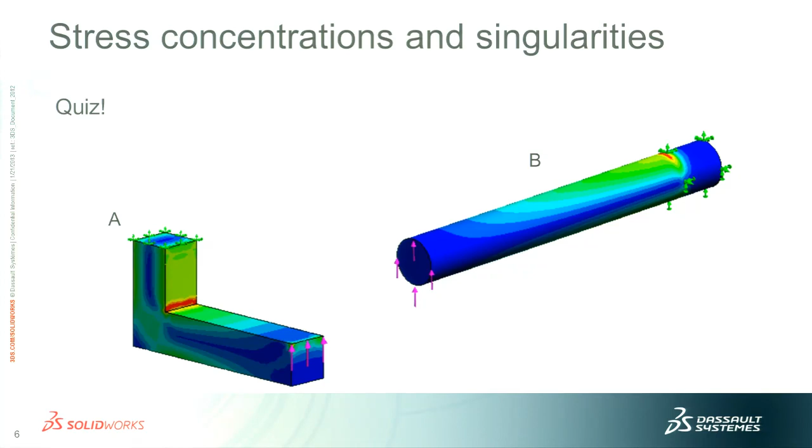Nobody? Oh, a couple of people, yes. And actually, there is a stress — it's a singularity that you got there. It's not as obvious as for the other one, but that's true. I encourage you, if you don't take my word for it, to model this. It's very simple — run it, refine the mesh, and refine it further, and you'll see that the stress is ever increasing.

Two more examples with the shell mesh now. We were using a solid mesh earlier. Model C, you have the four edges of this square hole. They're fixed, and we have a locally high stress there. Who votes for a stress concentration? Nobody — stress singularity. All right, you get the drill.

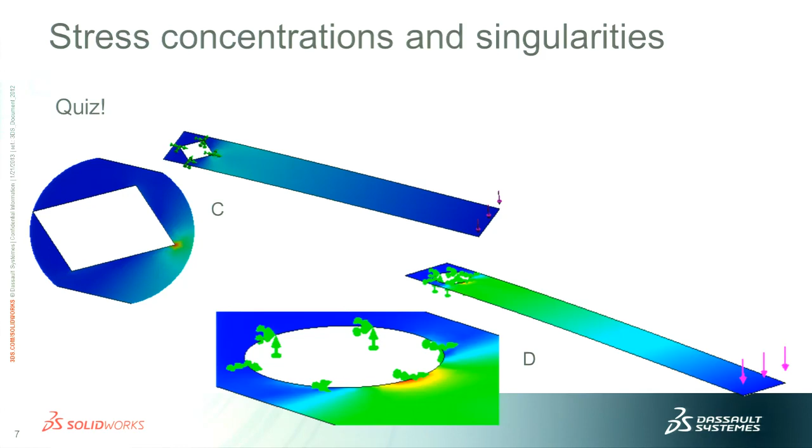And finally here for model D, where we have this circular edge that is fixed, and we have a local high stress there. Who votes for a stress concentration that will eventually converge? Yes, cool, stress singularity — no, it's not a stress singularity. It is a stress concentration.

All right, so this is maybe still a bit confusing for you, so we're going to go through an example. All right, let me drop this for a moment. Cool — oops, sorry about that.

So we have some kind of cantilever bar here, 10 millimeters thick, 100 millimeters long. We have a sharp reentrant corner there, so that's going to give us a stress singularity. If you do the math to calculate the theoretical stress right there, it's given by this formula, and you would get 300 megapascals predicted nominal stress.

What I'm going to show you in the following slides are the effects of two combined phenomena we're going to encounter. First is the effect of the stress singularity, which will make the stress value diverge and get higher and higher. The second is stress dilution — a local lowering of the stresses at the corner due to averaging at nodes common to elements with very different stresses. I'll show you that graphically a bit later. We're going to see that the relative influence of each of these phenomena depends on the local element size.

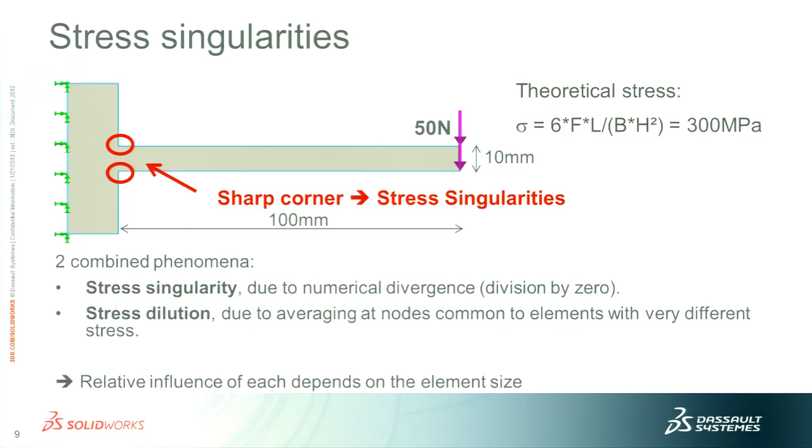So let's take a look at the first example. If I can go to the next — all right, cool. So here we mesh the model with an element size that's half the thickness. We can see the local high stress is there, but you can see that the max is not at the corner, it's slightly off. And if I plot the stresses, with the stress value on the vertical axis and the distance to this point on the horizontal axis, you see that close to the corner there's a drop. The stresses go down. And that's counterintuitive, isn't it?

Oh, come on. So this is what's happening.

There are two ways of doing stress averaging and getting results: elemental results, where you average the stresses within each element, and nodal averaging. What happens here is that if you take the stress at the corner node, the nodal stress will be the average stress taking into account the value for this node as it belongs to different elements. So the value here will be the average of this value plus this one and this one. So there is a local dilution of the stress value because it's averaged over only one highly stressed element and three elements with low stress — and this is what you see there.

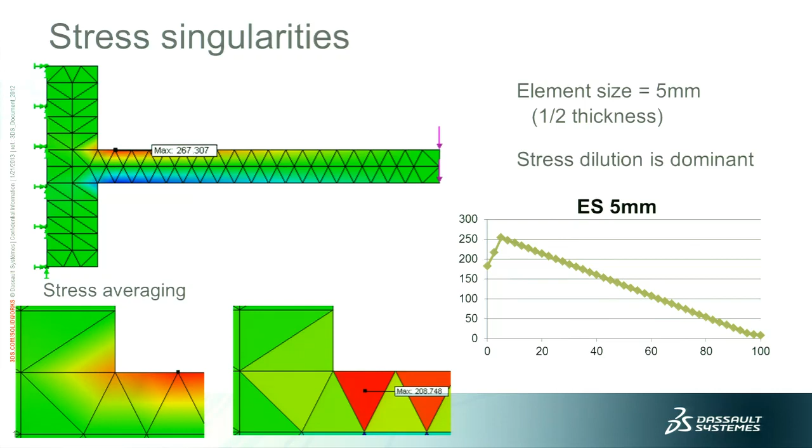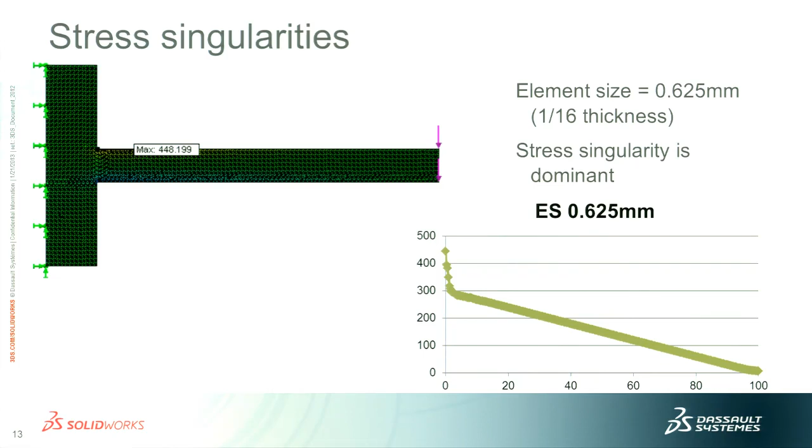Refine further, now I have 3,300, and it would go on and on. But if I plot all these graphs together and zoom in on this portion, focusing between 0 and 20 millimeters away from the corner, this is what we get.

Each curve represents the stresses with a different element size. If you use an element size of 10 millimeters, equal to the thickness, you're just off. But for everything else, you get a curve that is superimposed, and if you continue it in a straight line, disregarding what happens very close to the corner, you end up at 300, the nominal stress we calculated by hand. So even where you have a stress singularity, you cannot trust the value you get there, but you can continue in a straight line and get the nominal stress, which does not take into account the effect of the corner.

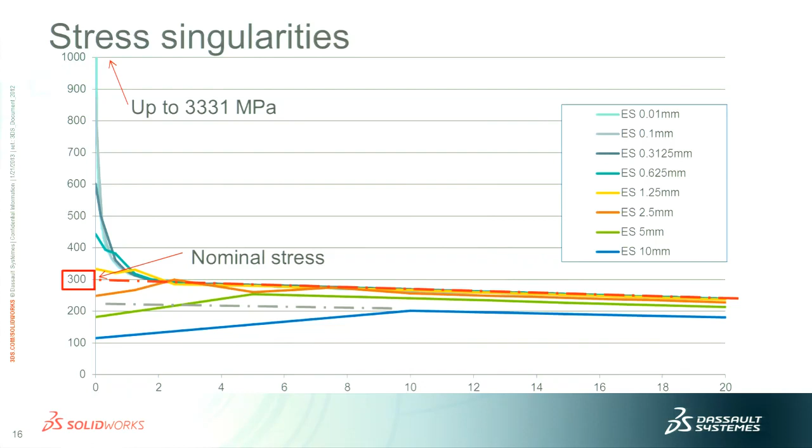In real life, perfectly sharp corners don't exist. So let's assume we have a very small radius there, which was not previously modeled, but which we can now decide to take into account. Books will tell us the local stress concentration factor, a multiplier used with respect to the nominal stress, and then you get the expected stress value there.

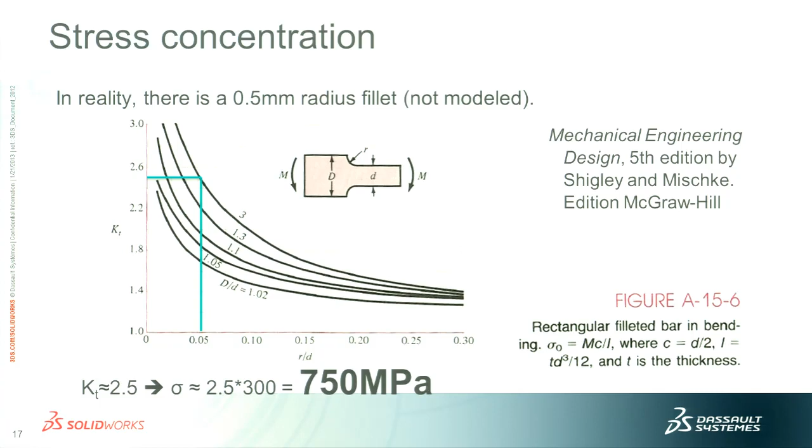I'm using this table from a book called Mechanical Engineering Design, and here the predicted stress concentration factor is about 2.5, which gives us a predicted stress there of 750. Sure enough, when the fillet is modeled with a relatively small element size, we get close to that value. We can try different mesh sizes there and see what effect it has on the stress.

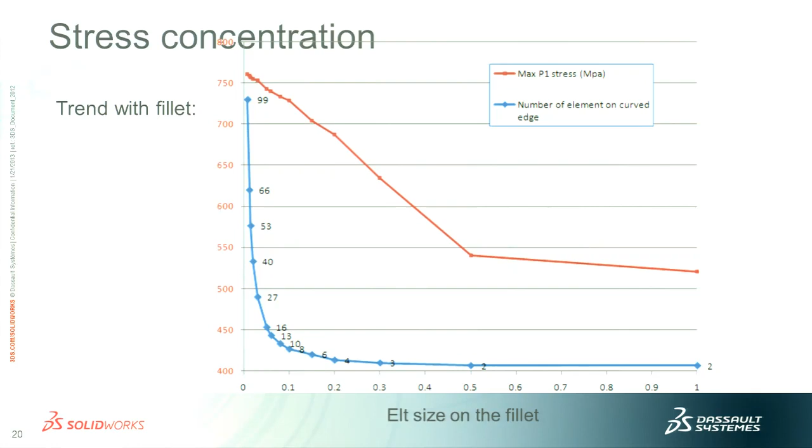To summarize: when you have a stress singularity, you can never trust the value you read off the screen. However, you can continue the curve all the way to get the nominal stress, in our case 300 MPa. If you're lucky enough to be in a situation covered in a textbook, you can get the stress concentration factor, multiply them together, and get the actual stress you will have. For a stress concentration, you should not take the value at face value when you have a coarse or medium mesh, but only when you have a fine mesh. However, with a coarse or medium mesh, the correct stress value can still be derived by extrapolation from several runs, just like the 750 mark was derived from this value and that value—continue in a straight line, and you get it.

So we can ask a question a bit further, because 750 MPa is quite a high value, and you might expect some yielding to happen there. So what if you actually had some local yielding?

What happens is that even though we predicted with the linear study a stress of 750 MPa, now the stress is barely beyond 300, the yield strength. Not only that, the yield area is quite small, right? We're not yielding across the entire cross-section there.

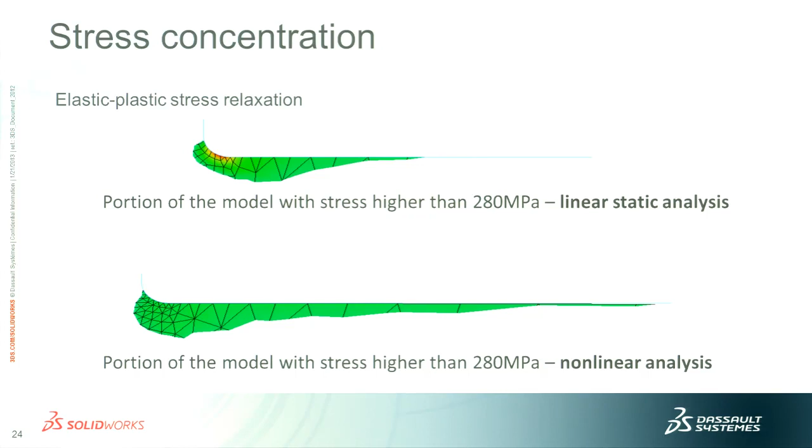And that's called plastic adaptation or elastoplastic stress relaxation. These are the two expressions that are commonly used for that. The material yielding prevented the stress from skyrocketing at the expense of two increases. The first is a stress increase all around the yielded zone, which is what I showed in my previous slide. And the other increase is an increase in the deflection.

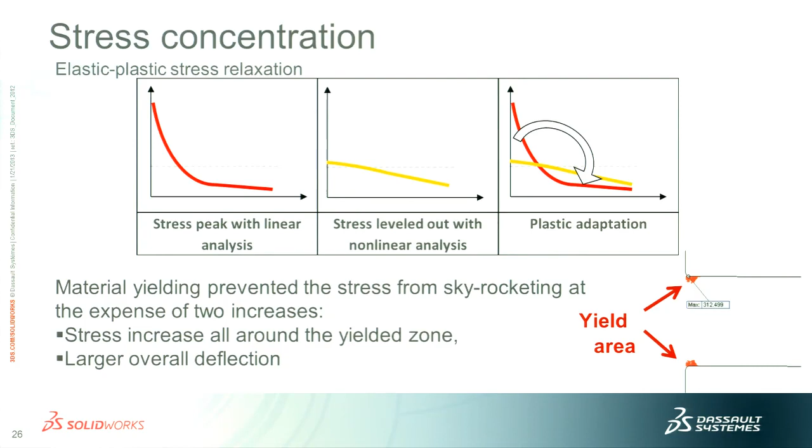Now, reflecting on this, we can ask three questions about the last model that we saw. First of all, will it break? Second question, is it safe? And third question, is it acceptable? Notice that these questions are different, they're not equivalent. So a structure can not break and still be unsafe. And a structure can be safe from a reasonable standpoint, but still not be acceptable because you have other considerations to take into account.

So here, will it break? No, the structure is not predicted to break. It will yield locally, but it is not predicted to break. Not at all. Is it safe?

Well, it depends on how the load that we had is applied and how many times. If you apply it dynamically, you will have other effects, like dynamic effects, that you will have to take into account. And if you apply this load many times, 20, 30 more times, you will have fatigue. So fatigue will be a concern.

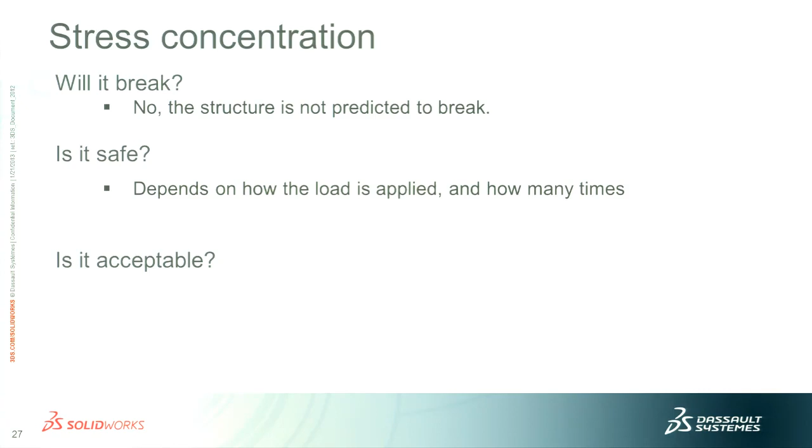And I'm not talking about high cycle fatigue. I'm talking about the type of fatigue that you get from when you bend back and forth a little strip of metal, and then after 20 or so bends, it ends up breaking.

And is it acceptable? Well, it will depend on other considerations like the regulatory environment that you have to go with, some specific requirements that you only know about that are specific to the type of design that you're doing, and to your customs. And of course, they're all industry specific. So the answer is always specific to a certain industry, and no general assumption or firm answer can be given at this point.

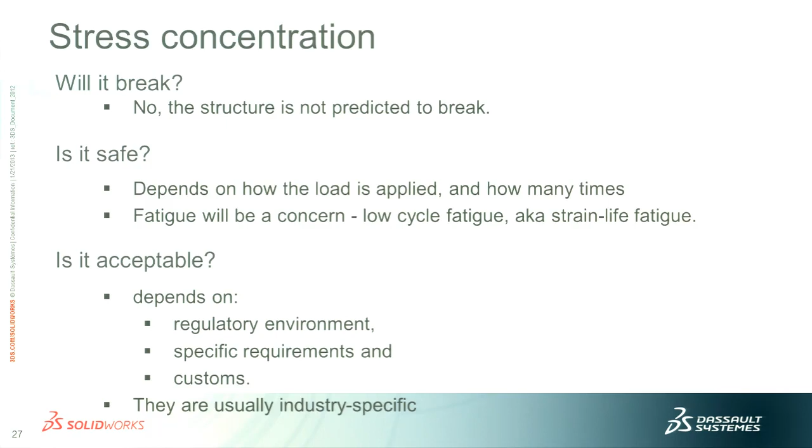All right, we're going to move to solver speed, which is a big factor now. The variety of machines that you can have is greater than ever. There are lots of study types that you can run, and the time your analysis will take is a result of numerous factors: the type of machine you have, the number of CPUs, the amount of RAM, the type of study, your study properties, the type of elements you have, whether you take contacts into account or not, whether you have bonded contact with compatible or incompatible mesh. All these will have an effect on the solver speed.

To give you a bit of perspective on what's going on, this slide shows that not everything in SolidWorks and SolidWorks Simulation is multi-CPU enabled. The user interface is not multi-core, multi-processor. The standard mesher is not either.

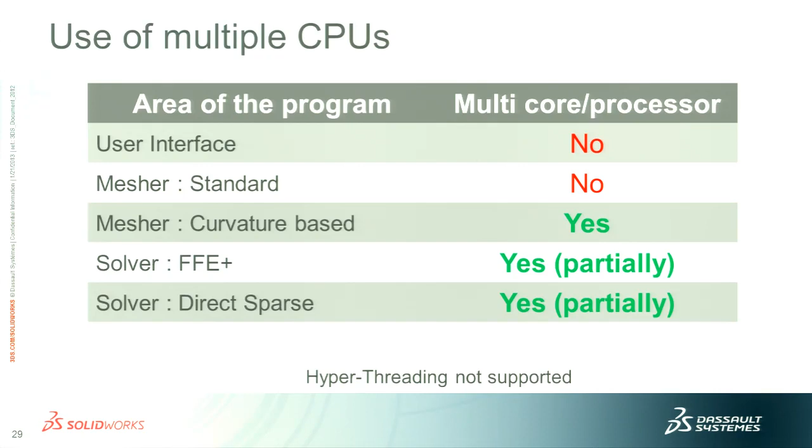The curvature-based mesher, however, is multi-core. And our solvers, the FFE Plus and the sparse solvers, are also partially multi-threaded. But not everything about the solvers is multi-threaded, as we'll see here.

When it comes to the sparse solver, you also see that there are stages where only one core can be used.

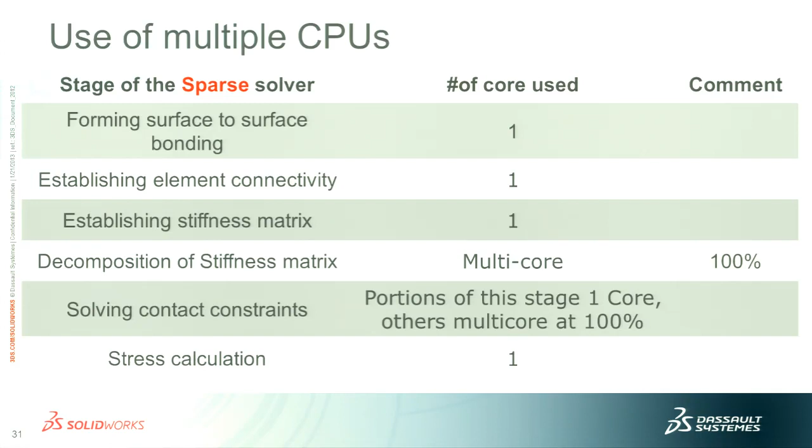Because some portions of the analysis only use one core while others use several, you have to find the right balance between ideally having one extra powerful core so the single-core stages are optimized, and having many cores so the multi-core-enabled stages can benefit. You have to find a balance between that.

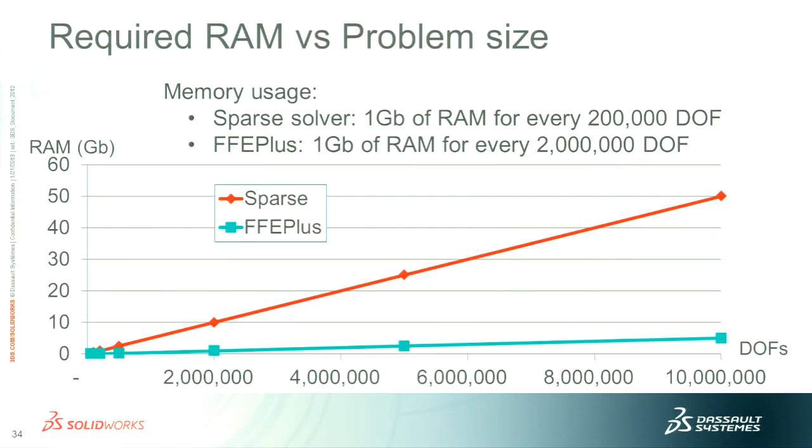But this is all relative — I'm not directly comparing the solution time for FFE Plus to the sparse solver and comparing each one in its own world.

If you take samples, run them, and compare all together, you see that with a simple part, solid mesh, one load and restraint — the most basic type of model — even though you get a huge increase in performance between 1 and 4 cores for the sparse solver, with a much smaller decrease in solution time, it's still FFE Plus that is much, much better for that type of analysis.

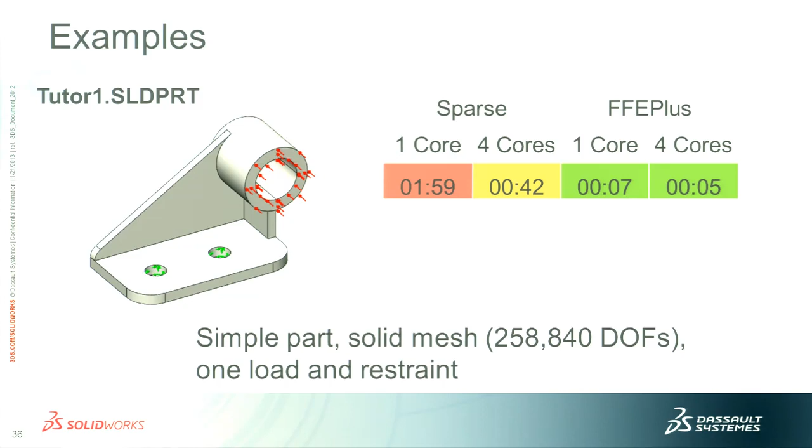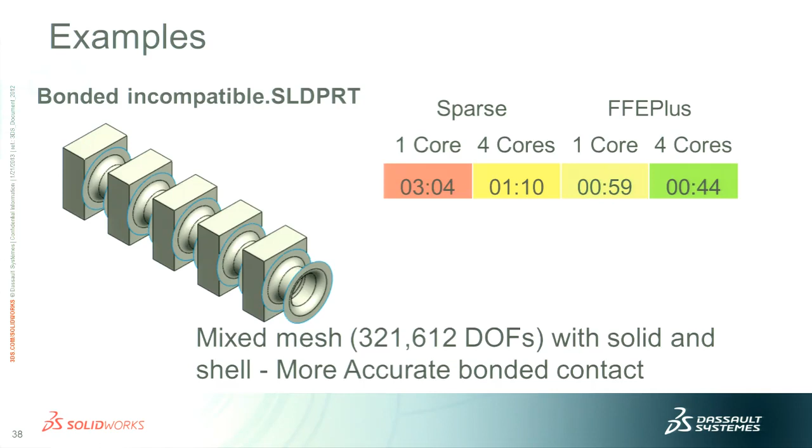And you can do that with different types of models, and you'll see a pattern will emerge of which solver will be the fastest one. And the pattern leads you to have simple rules that you can implement. I'm summarizing them here.

So the recommendation for static analysis, which is, I guess, what you mostly run, is this. Use the direct sparse if you have enough RAM and multiple CPUs, because I doubt you will have computers with only 2 of them now. So it's probably 4, 6, 8, or maybe 12. Use it when you have models with no penetration contacts, especially with friction.

When you have models with parts with widely different material properties. I'm talking about steel and rubber together, maybe, or steel and plastic.

And when you're solving models where incompatible mesh is bonded using constraint equations. That will happen where you're using mixed mesh, so beams and solids, shells and solids, shells and beams - different element types. Or where you are using bonded contact sets.

And I'm making a distinction between the global bonded contact that you can define that applies in your entire model and what you define manually. In all other cases, FFE plus.

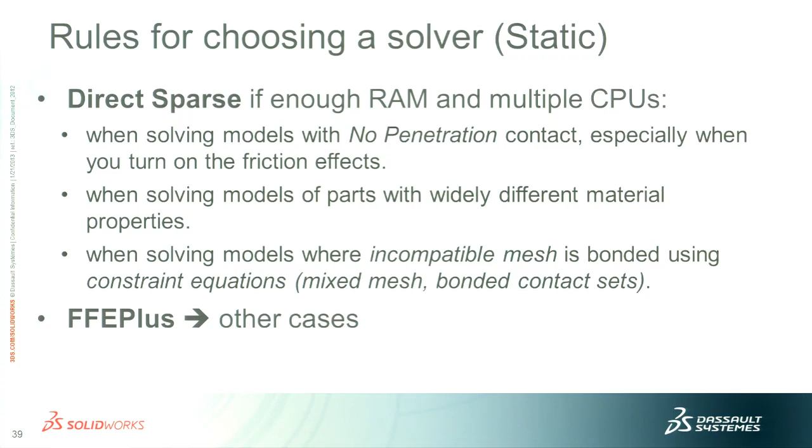For nonlinear analysis, I have a simpler rule, and you're going to like that. Always use the sparse.

How much RAM is enough? When you say RAM, 32? All right.

For any machine now, you need about 2 gigs for the operating system and everything that's around it - Outlook, whatever internet browser you have open. So you take whatever amount of RAM you have, you remove 2 gigs. That's what's left. With what's left, you take 500 megabytes for SolidWorks itself, something like that. And then what's left is available for your analysis.

And then, for 1 gigabyte of available RAM, you can have 200,000 degrees of freedom with the sparse solver. So that gives you the maximum size of the analysis you can run.

Don't try to use your swap space, your hard disk drive, to complement your RAM. It's possible only marginally, like when you're missing maybe 10%. You need 10 extra percent of RAM, maybe it's going to work. But if you're trying to double your RAM by having a huge swap space, forget about it.

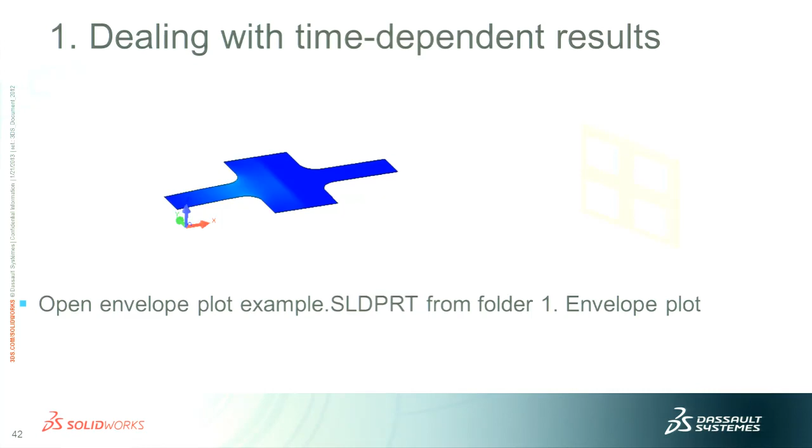Cool. All right, tips and tricks. We're going to talk briefly about dealing with time-dependent results that you will encounter when you're running transient thermal analysis or nonlinear analysis, for instance, or dynamic analysis also is another good example.

For taking a look at these time dependent results, there's a very, very nice plot called the envelope plot. And this plot will give you in a single result the node's max or min value, depending on what you choose, throughout all the time steps that have been calculated.

So at node number 1, it may take the result from time step 2, and at node number 2, it will take the results from time step 5, and so on. This is very efficient for getting your results.

For example, in a nonlinear study, one force peaks and goes back down at one end, and then afterward you get another force on the other side that starts and goes back. You're not going to get the max stress at different locations at the same time.

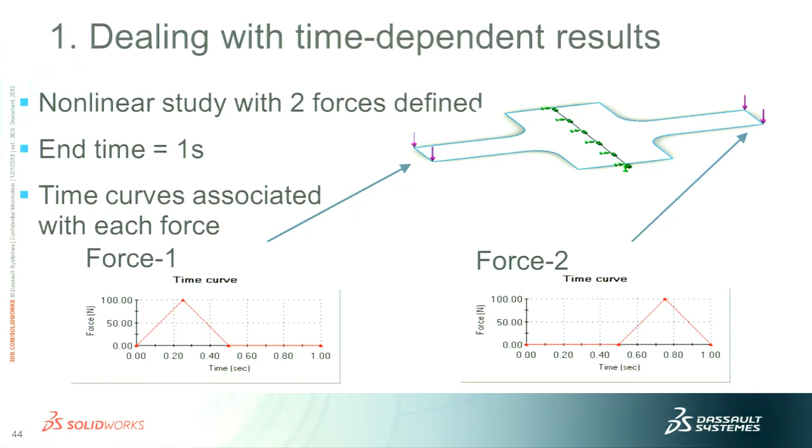That's when an envelope plot comes in handy, because first you'll have only half of the model stressed, then the other half, but not at the same time. So you'd have to juggle between different plots.

With the envelope plot, when you define a stress plot, you choose the option that plots bounds across all steps. You use the maximum, and you get a summary of everything.

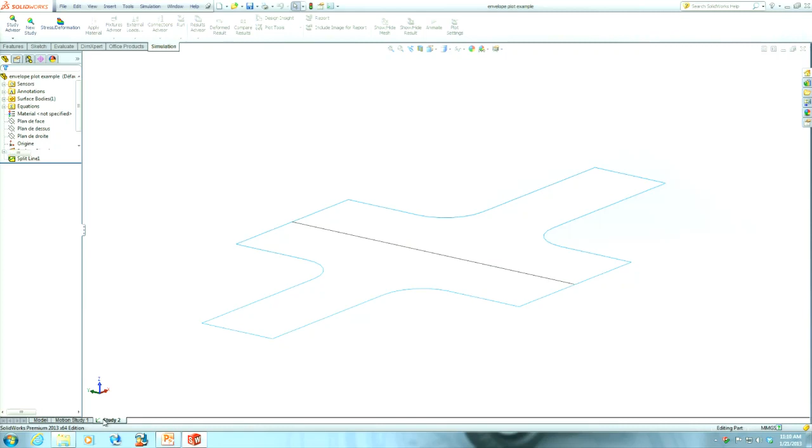What's nice about that is you can probe the value, get the graph, and from the max, easily see when it took place.

Now sensors have the capability of taking advantage of transient results. Once you create a transient sensor for stress, you automatically get a plot showing what value the maximum stress takes at every single time step in your simulation.

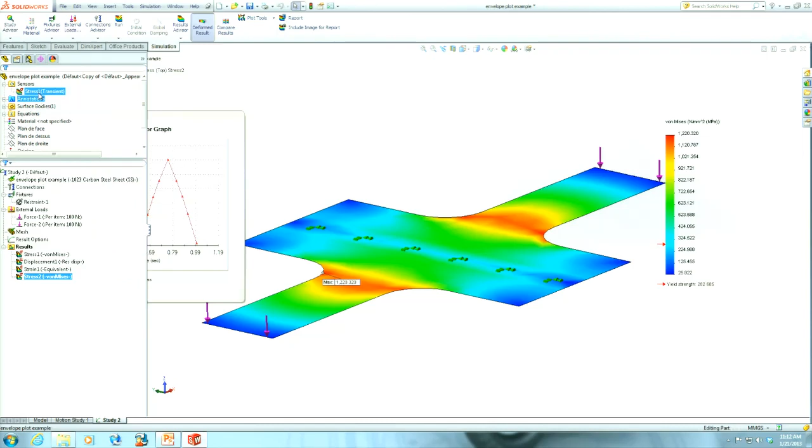Transient sensors are a new feature of version 2013. You choose simulation data, then the type of quantity you want, and then the type, which is transient. That's how you get the plot I just showed you.

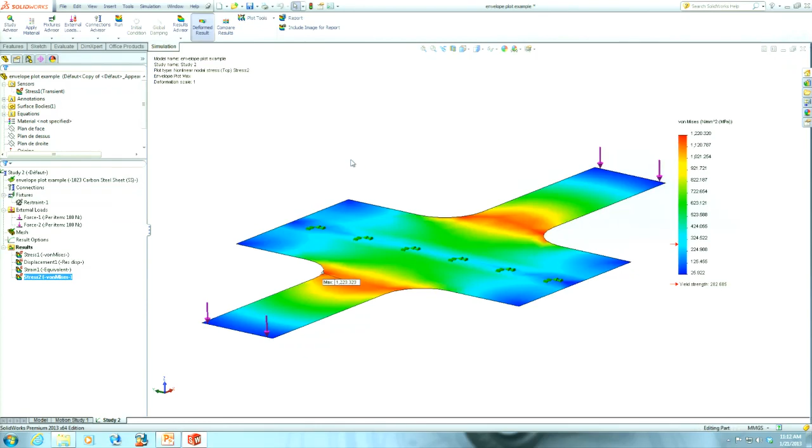Another quick example: for thermal analysis, you have 4 chips, 4 heat powers, each with its own time curve.

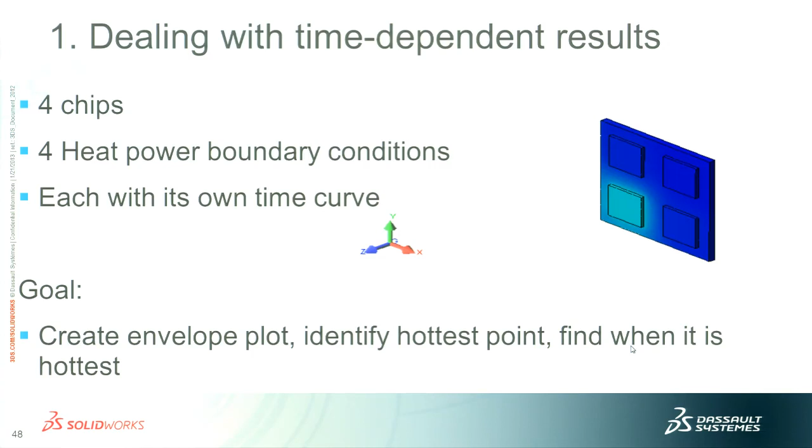And you can easily find the maximum temperature in the entire model.

Here I have my model, and each chip has a heat power with its own time curve, different for each one of them.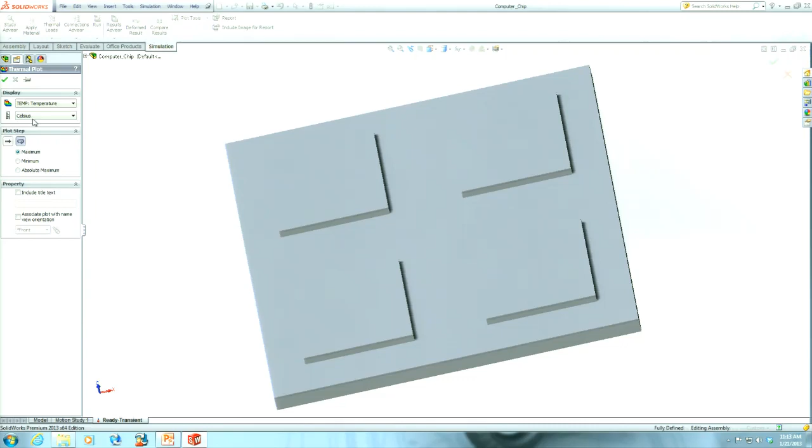So you create a thermal plot for temperature, maybe in Celsius, and then use plot bounds across all steps. Then you get that, and you can double click here, and it opens the property manager to show the max annotation. Nice thing — if you want to change the unit, just double click here.

Let me hide this, go back here. You can double click and change the units maybe to Fahrenheit if you want.

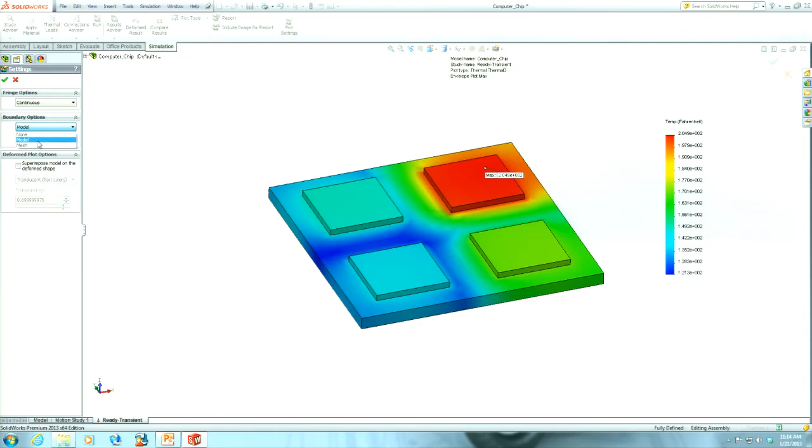There's another customization you can do. Right click and go to customize, go to commands, simulation, and then the one you can drag is the plot settings, which allows you with one click to access and be able to plot the mesh if you want, so you don't have to go and wonder which menu to use.

And once again, the same sensor I created earlier will tell you when the maximum temperature takes place, and you get the location too.

I'll show you a bit later that these graphs are also available for nonlinear analysis, and when you have reaction force or contact. This is a new feature introduced in version 2012 SP2.

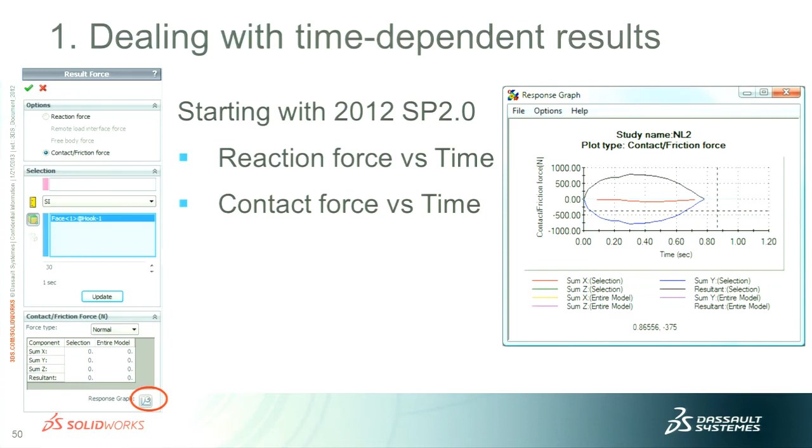All right, let's move on to this interesting model.

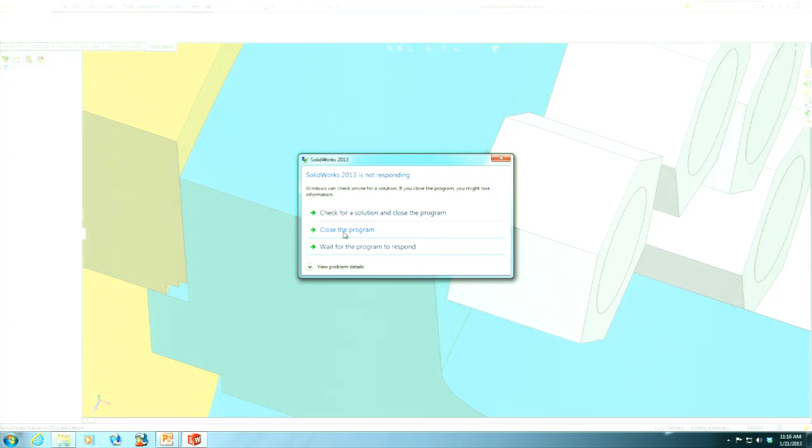And it's an interesting model... because... it's an interesting model. And it's an interesting model. And it's so interesting. And you find that funny? Come on, have pity for the Frenchman. All right, let's go. Okay, let's investigate. I'm glad we're not alone. All right, there you go.

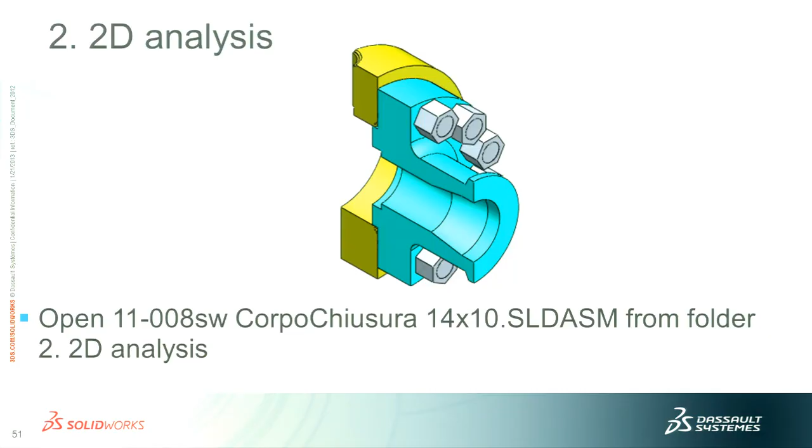All right, let's investigate. I opened the model, and SolidWorks froze, right? Let me open SolidWorks again and try something. In the add-ins, I'll remove SolidWorks Simulation for the moment, and I'll take the same model and open it.

All right, it's not frozen. Tools, add-ins, simulation. All right, it's not moving at all.

All right, see, we're not alone. But how about we try to be smart? There's a simulation cleaning utility — I have it here, but you could also get it from the installation of SolidWorks Simulation.

Let me copy and paste, browse, filter to assemblies, open this assembly, which is the one I just opened, and clean the file of all data from simulation. Clean file. All right, cool. Close SolidWorks.

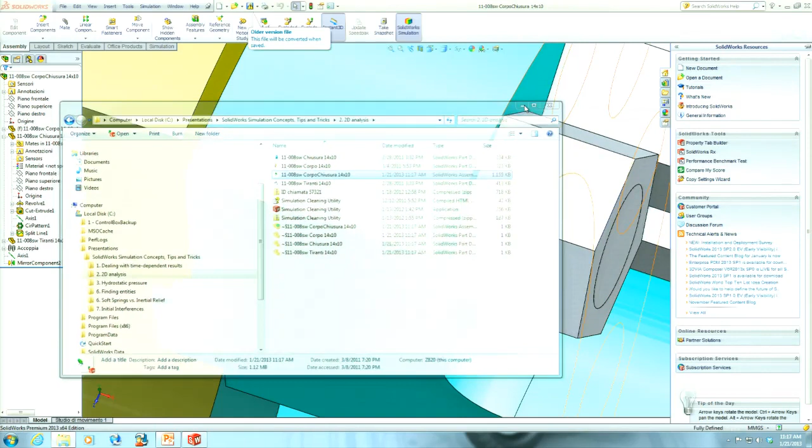Simulation is added in, and it's not frozen anymore. How is that cool? That is too cool.

Presenting the simulation cleaning utility for cases like this. The simulation cleaning utility fixes corrupted files. It allows you, even though your file may not be corrupted, to get a fresh start. Maybe it's a file you've been working with for a long time, created so many simulations you can't remember anymore, created studies, deleted them, recreated, copied, pasted, everything. Your file got so large it takes time to open now. This tool will let you get back to a fresh start.

It is installed with every single SolidWorks simulation installation, typically in C:\Program Files\SolidWorks Corp\SolidWorks Simulation, and then Utilities. It's all available to you guys, and it works for everything: motion simulation, sustainability, flow simulation, flow express, and everything.

So yeah, SolidWorks crashes on my command only. Okay, so we're no longer...

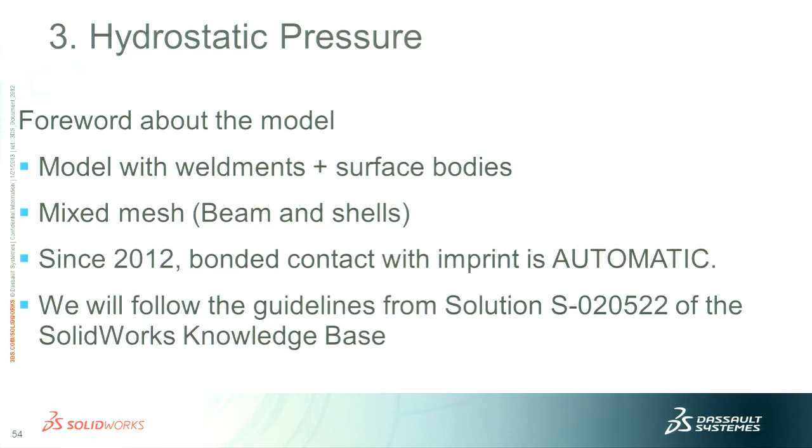The guideline makes it as simple as possible to apply a non-uniform hydrostatic pressure that varies with depth. It goes like this: first, you create an appropriate coordinate system. The coordinate system has to be at the top of the water or liquid, with the y direction going downward. So at the top, y goes downward.

Once you've done that, you multiply the mass density with the gravity, then you enter a value of 1 here, and 0 everything else. Your coordinate system is selected there, and that's all you need to do.

So that's what's been done here, as you can see. I'll give you this model, by the way. So there we go - you see my coordinate system right there, and all the faces have been selected.

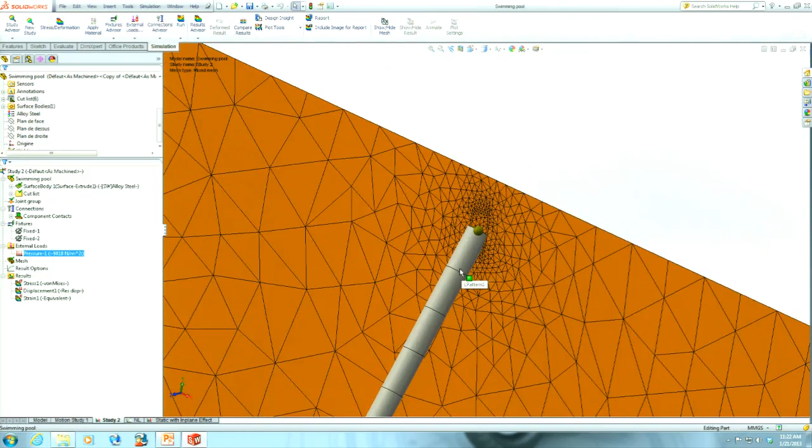Now, if your structure is deep underwater and it's inconvenient to place the origin of the coordinate system at the top level of the water or whatever liquid you have, you can put it at a certain depth. If you choose to do so, you follow the same rules as before, but you enter the depth of the coordinate system's origin in meters as the constant value. So if the coordinate system's origin is 100 meters below the surface, you enter 100, not minus 100.

And that's all you have to do. So let's take a look at the study results we got for this analysis. I can plot the displacements, for instance. Now, you see how each panel kind of ballooned?

That may not feel right, and that's because flat panels, when they have pressure, have a stiffness that varies and doesn't stay the same. When something is perfectly flat and you press on it, you start pressing and you only get a bending stiffness. But as it deforms, you start to have tension throughout the thickness, and this increases the stiffness of the plate.

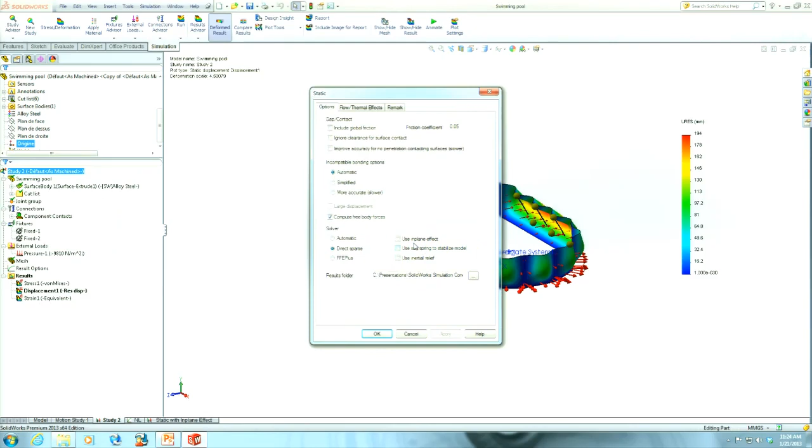This is an effect that is called stress stiffening, or it's called in-plane effect in the interface. I can show you - we have an option to take that into account, it's right there: use in-plane effect. I did not use it there. This in-plane effect is an approximate way of taking this type of stress stiffening effect into account. It's not perfect, but it does the job.

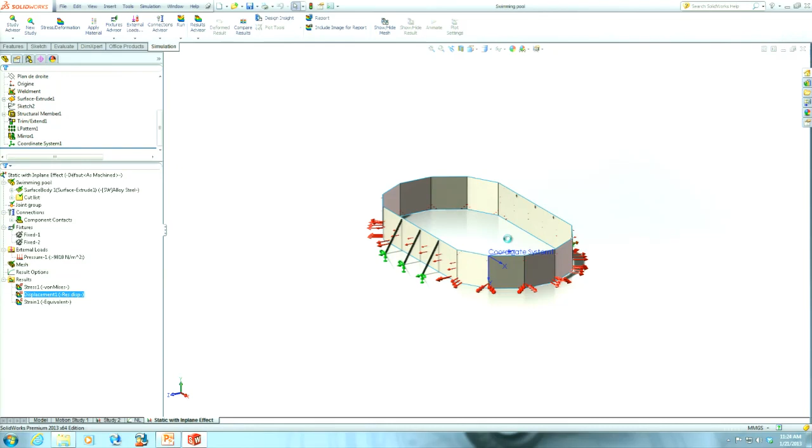And if I run exactly the same analysis with in-plane effect, you'll see that the value here you got for the maximum deflection is much lower than before.

Right? It decreased.

But the best results you'll get with a nonlinear analysis. Because with a nonlinear analysis, you can control a bit better how often the stiffness of the model will be recalculated. For nonlinear analysis, we apply the loads gradually, incrementally, and you can recalculate the stiffness matrix with every step.

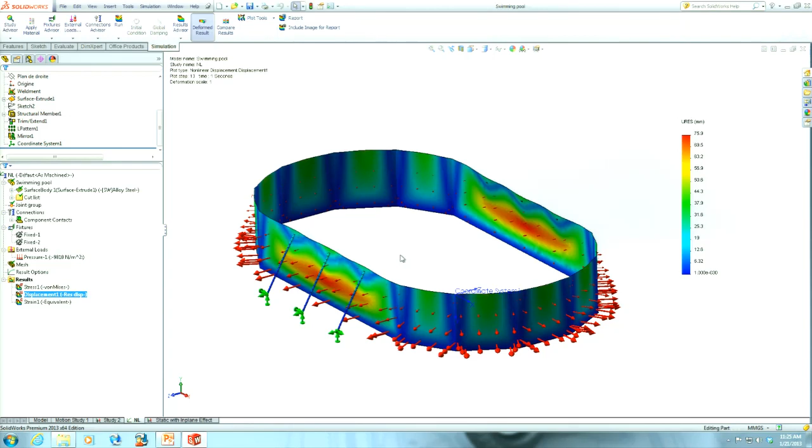And that's how you capture best the evolution of the stiffness of the model when loaded. You can go to this solution that I'm presenting here that explains exactly how the in-plane effect option works, how it improves the capture of this stress stiffening effect, what the limitations are, and showing also that the best results are always obtained with a nonlinear large displacement analysis.

Many times, when you have a model with weldments and shells created from surfaces and solids, and you wonder where the center of gravity of your model is located, and what the total mass is. And it may be different from what SolidWorks will give you, because SolidWorks doesn't know the thickness and material for the surface bodies that you created. It doesn't know whether you created additional mass, like a remote mass or distributed mass on your model.

And you may have changed the materials, right? You can define the materials in your study. In these cases, to get the actual center of gravity location, and the total mass plus other properties, you should create a static study, define gravity, and run the simulation.

Then, in the output file, it's a very interesting file that's created by the solver. It's located with all the other result files. The output file can be opened with any text editor, and it will contain information about the properties of your study, some results for reaction forces, for stresses, for max deflection, for the strain energy in the model.

But also it contains a table where you will read the mass, the volume, the weight, taking into account the gravity, and then some other properties like center of gravity, but you'll have the mass moments of inertia and a lot of useful information. If you need to find where your CG is from everything you set up in your study, that's where you'll find it.

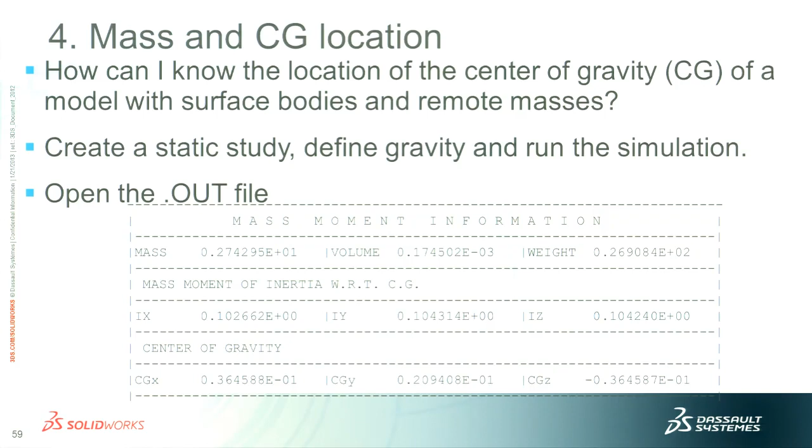A very nice tool that I want to show you is the search tool. The search tool is actually this little thing that you get here at the top of the simulation manager. Do you guys know that it exists? It's barely noticeable. Okay, a number, who uses it for simulation? All right, this number will increase.

All right, let me close this.

All right, this is just a model that I created to show you why you might want to use it. It's a pattern of the same part. And this part has two surface bodies and then one extrusion and structural member. And it has been patterned many times. So there's so much, I can't even scroll and show you the whole tree if I expand everything.

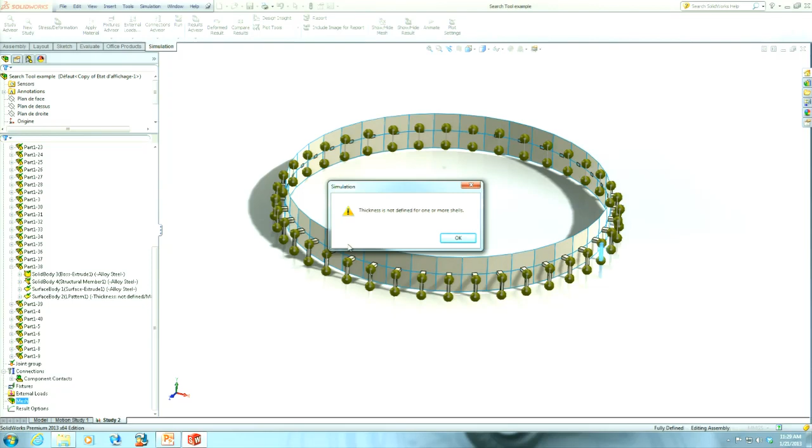But what I want to show you is that if I mesh it, it's going to tell me that it can't, because thickness is not defined for one or more shells. So typically what you would do here is say, oh man, all right, which one is it? And you go there and do stuff, but then what is the problem here? The problem is that thickness is not defined. I don't even have to type 'defined' - look, it found it, because in my surface body, it says here thickness not defined.

So I can isolate very easily the items in my tree based on simple keywords, such as thickness not defined. You can use it for other things, for instance. Let me clear that so that I have the whole tree once again.

All the bodies here are alloy steel, but I know that I created one out of iron. I could ask it to go find it, but it's like finding a needle in a haystack. If you type iron, there you go. That's the one over there. I can see it, it's this one.

The search tool is very powerful when you have complex models, when you created many contacts, many forces, many loads, when you have a long tree structure. You can use it to isolate the types of bodies that you want. For instance, I want to isolate all the surface bodies here quite easily. It's a tool that's very convenient when you have complex models. Very simple models, frankly, you don't really need it, but for complex models it comes in super handy.

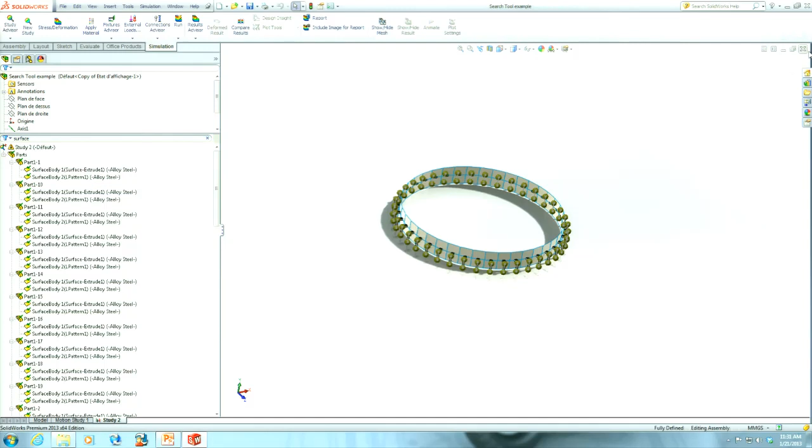All right. Cool. Awesome. I have about 25 minutes, and it's awesome because we're right on time.

I'm going to have some time to go into the details of these models. There's something that's always a bit difficult for users: how to handle analysis when you have interference between your components in their modeled state. There are several ways to go about that, and I'm going to explain them. These models will be part of the proceedings, so you'll get the models with the studies all set, plus this recorded explanation.

This is a model where we have a little star that looks like a gear, and another part here that goes between the teeth. With this first example, I'm going to show you the solution with non-zero initial displacement.

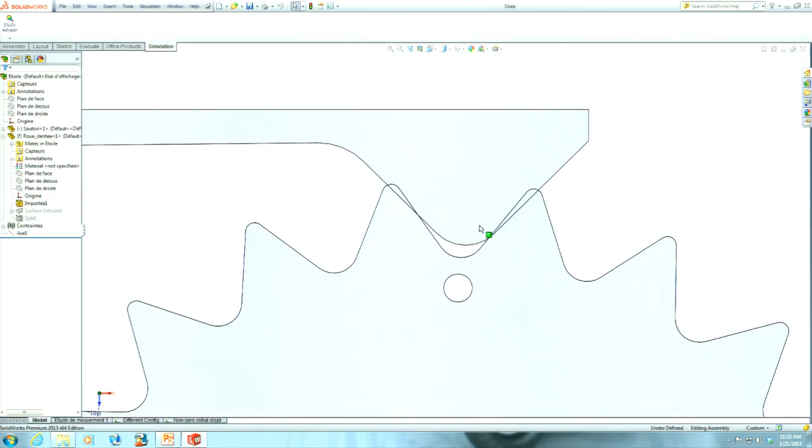So this is my model, and as you can see as I zoom in, we have initial interference between the parts. The purpose of this simulation is to hold these two circles in place and have the little star rotate about its center.

One way to do that, frankly, would be to create a different configuration. Let me zoom in so you see it. When I activate this configuration, see, I cleared out the interference. What I did is modify the distance here, and I created a new configuration where my part is just a bit higher.

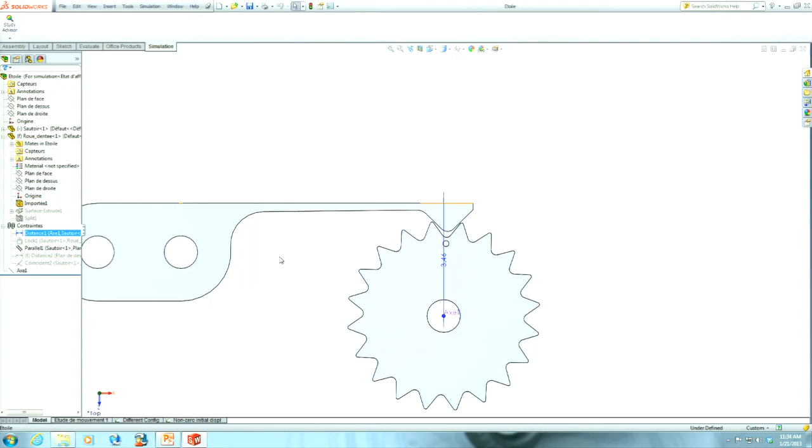So all I have to do now if I want to run that is move it back to its original place, 0.1 millimeter down. I put it back down using this time curve: from 0 to 0.1 second I move it back down, then leave it constant. Then the other prescribed displacement is the rotation of my little star, which takes place from time 0.1 all the way to the end.

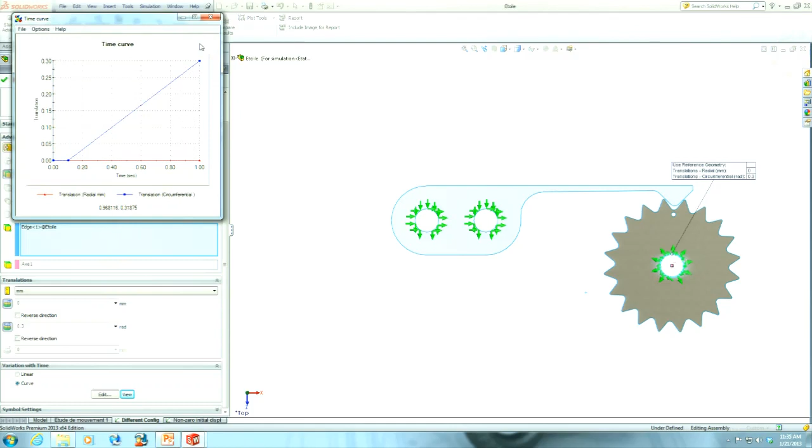If I do that, let's take a look at the displacements. I'm using a time step of 1 and reducing speed to the minimum. Hopefully you see that it moves down and then it rotates. First solution: create a new configuration wherever possible to clear out your initial interference, then move the parts back into place and run the simulation you want.

But maybe it's inconvenient for you to create a separate configuration. So we can go back to the default configuration and define a non-zero initial displacement.

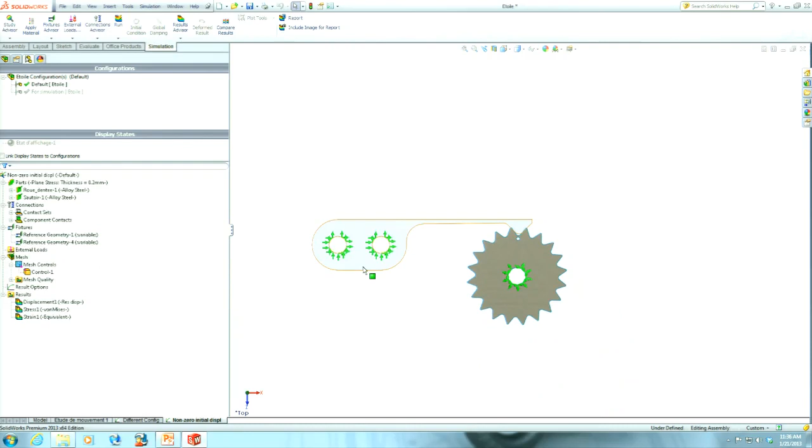I can create a curve where the value is not equal to 0 when time equals 0. So at time equals 0, that's the initial condition taken into account by the solver. My part will not be where it is, but in a moved position. That's my initial state, and then I release that displacement back to 0, the initial location. Then I'll do the rotation of the other part.

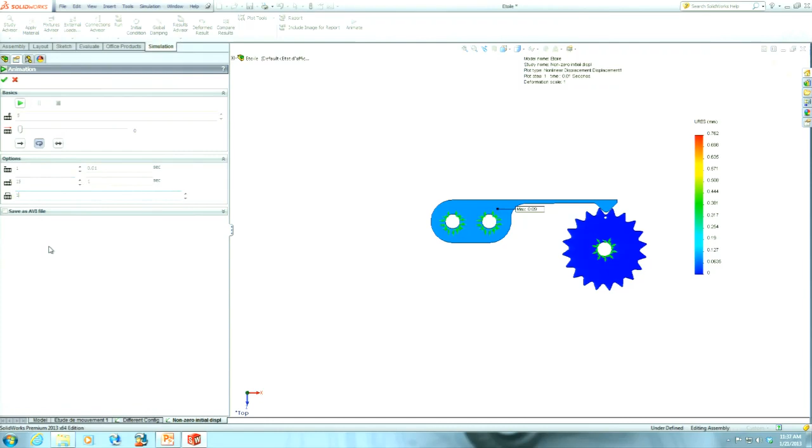That's the second possibility to handle this. Let me add the animate command again: simulation, animate, here. Once again here you'll see it move back into place before it rotates. So second possibility, non-zero initial displacement. That may not come naturally to you, but it's perfectly allowed.

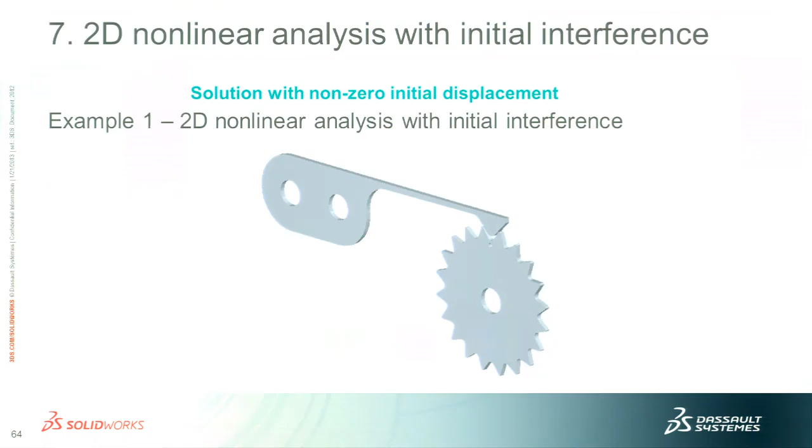All right. Cool. I'm going to show you another possibility.

Solution with thermal shrinkage. Here we have a model with a rubber part, it's green, and a metallic ring, and the goal is to put the ring inside the rubber. There's no way you can move one with respect to the other to get it inside; it's just not possible, the ring is big and the rubber part is too small. So what we're going to do is use thermal shrinkage, and this is how it goes.

It's a two-step process, and I'm using 2D analysis here again. The first step is to find out how much you need to lower the temperature of one of the parts to make it shrink so that you get it where you want. Of course, if you don't want to cool one part to make it shrink, you can heat up the other one to make it expand instead. It's about equivalent, and it's your choice, but it's the same method.

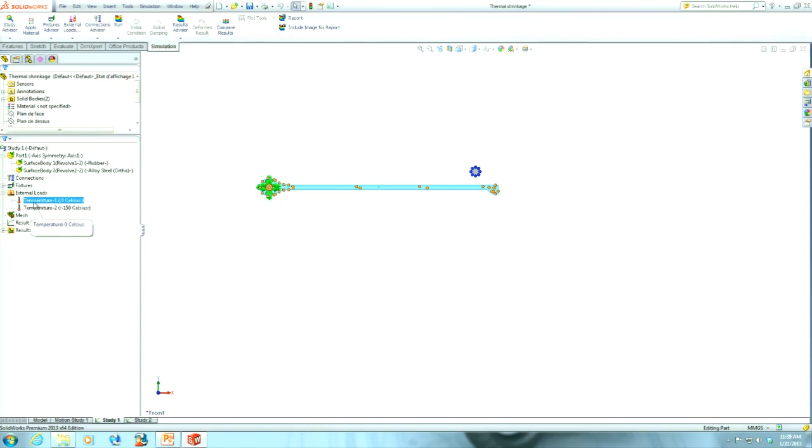So here I defined a zero temperature, which is my reference temperature at zero strain. I don't want to change the temperature of the rubber part, but I want to change the temperature of this steel ring, lowering it down to minus 150 Celsius. I'm using a special steel, orthotropic, so that it only shrinks in the direction that I want.

And I used a slightly higher thermal expansion coefficient. But the point is that when I run the analysis, I'm able to make it shrink so much that it goes to the correct side of the rubber part. See that? It shrinks and it moves down.

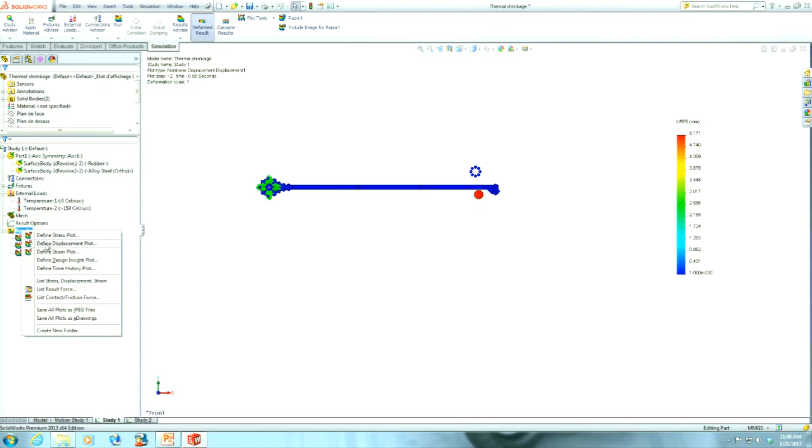I guess I could do that. Let me define a displacement plot, show us 3D, maybe with 270. So this is what happened, right? Now it's inside. You can see it clearly now that the ring is inside.

Cool. So I need to find out what is the right temperature to get it where I want. I see that at step number 12, the temperature is 0.95 times 150, that's about 140 Celsius. It's right where I want.

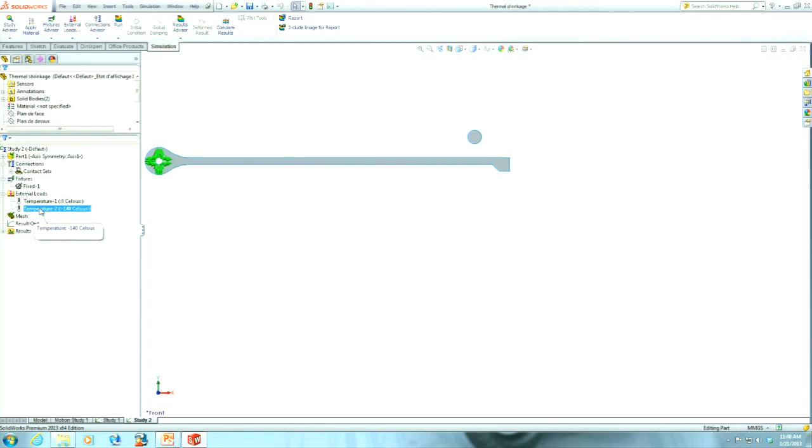So then what I do is define another study. I just duplicated the study and put my part at minus 140 degrees Celsius initially. At time step equals 0, it's already very cold and it's shrunk. Then I release it gradually back to 0 so that it comes back to its original size.

And when I do that, this is the time plot for Study 2 that I got, but I can animate it. Let me make it a bit finer. And this is what you get: it starts on the correct side, and then you release it so that it gets back to its original size.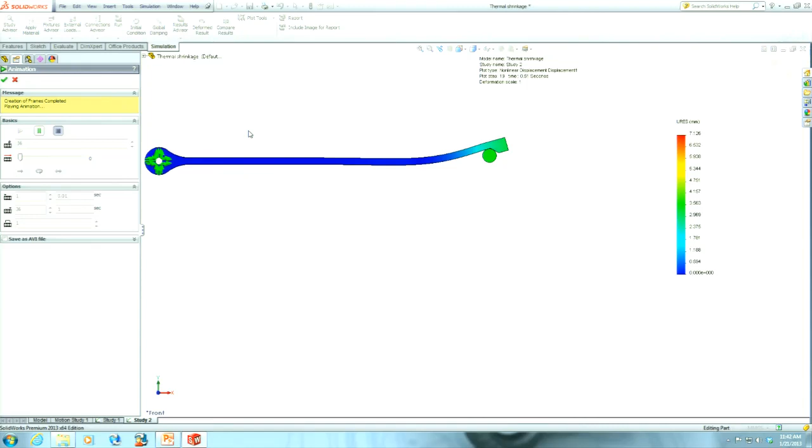Of course, you probably wouldn't do that in reality to mount them together. You'd probably use a tool to expand one versus the other. But whatever method you use, at the end you'll get a shape, displacement, and stress state that is exactly the same as what we have here. Thermal shrinkage is the second option you can use to do that.

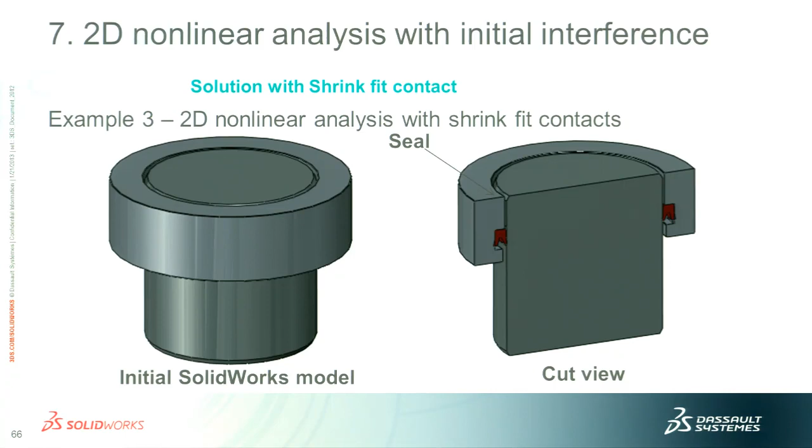Now, another example that would be interesting to run is this, where you have a seal, and the rubber seal has to deform to get into the groove it's supposed to be in. That's something I could show you, but there's an option you'll need here: to update the load direction with the deflection, to ensure that the pressure, because there's a fluid and pressure, stays always perpendicular to the surface of the model, whatever its deformed shape is.

That's an option that we had in 2D until version 2011 SP3, and you don't have it anymore. It's grayed out, so you can't run this type of analysis anymore. Too bad.

But if I was a user and I wanted to use the update load direction option, I'd try to notify SolidWorks that I know what's going on. So this is what I would do.

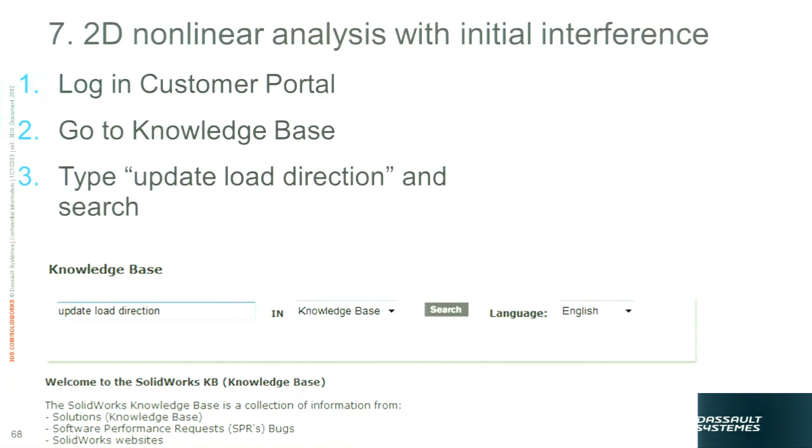I'd log into the customer portal, go to the knowledge base, type 'update load direction,' and search. I'd filter to only take a look at SPRs to see if there's anything known about that.

And I would find an SPR like this one, which asks to revert this SPR and make update load direction with deflection available again in 2D, blah, blah, blah. That sounds like something I would want, right?

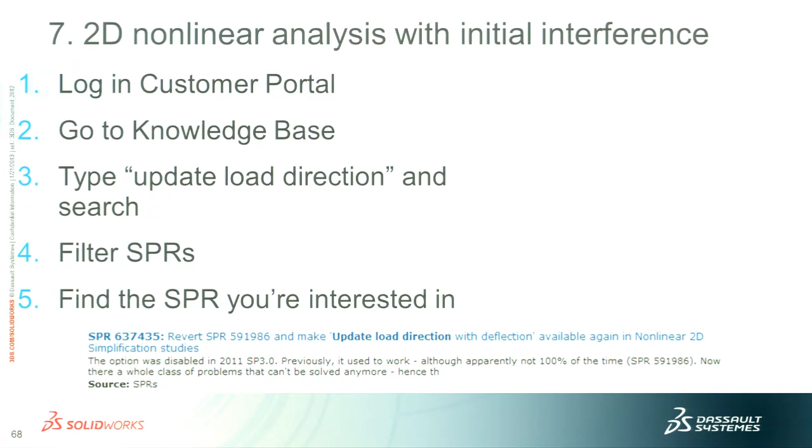And then on the left-hand side, I noticed there's this: 'Find what you were looking for?' Yes, but notify me when this is fixed. This is the way you can let us know which SPRs you're interested in having fixed or monitored. If you do this on your account, you'll receive an email notification when it has been fixed.

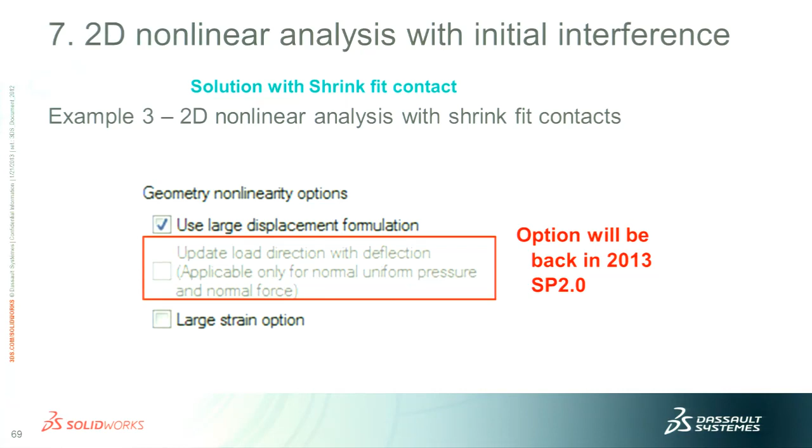Now, luckily, this option will be back in 2013 SP2.0, which is due next week, something like that. I have the evaluation version already out, but this will be possible very, very soon. At SolidWorks World, we only have SP1 installed, so I cannot show you this, but I'll show you something roughly equivalent.

It's a shaft with bellows, right? That's what you call it. And you see the initial interference there. The purpose of this simulation is to maintain the end face, the annular face there, fixed, and then to pull the shaft so that you compress the bellows.

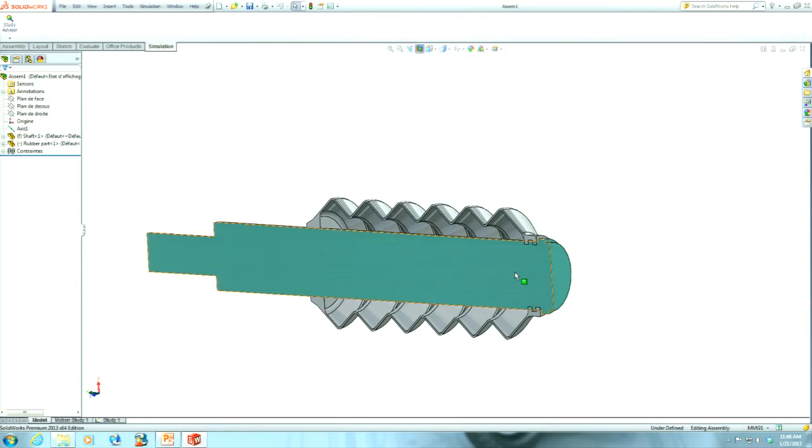And I thought that'd be something interesting to show you, because with this example, we're doing... okay, I'm showing you the model. This is section view, so you can see the interference.

Cool. So this is the initial displacement that we defined to make the shaft move to the left, and we are defining fixed conditions there.

And what I want you to notice here is the shrink fit contact that I defined. This is my solution here. I consider that the interference is not so great that a shrink fit will fail. The interference is mild, and I think it will work.

Every time you define a shrink fit in a nonlinear analysis, it gets solved at time step 1. So it's a single step operation for the solver. It works or fails at the first step, but you don't get two steps, you don't get any intermediate position to solve.

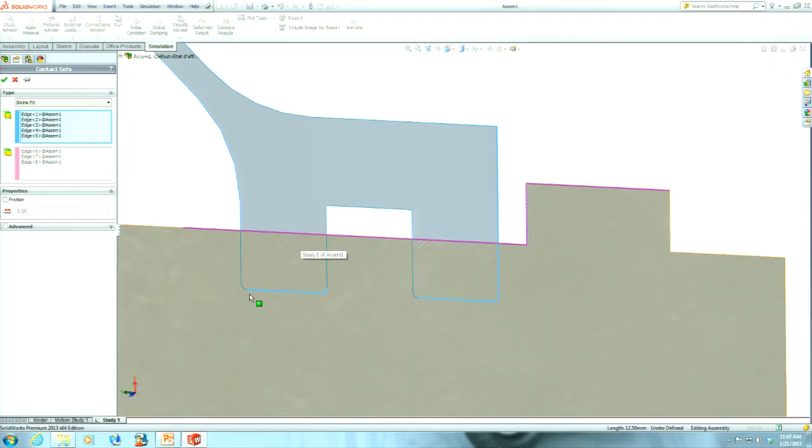My contact definition here is shrink fit, but I want you to notice that I'm not just selecting the faces or edges that are in the penetration zone. I'm also selecting whatever makes sense from a logical, physical standpoint. I'm selecting a bunch of edges from this bellows, and those three purple edges from my shaft. It's a common mistake to try to use only one edge in the first box and one edge in the second box, and then you end up with a list of contact sets that's longer than my arm, and it's very, very difficult to manage.

Here, there's shrink fit, there's initial penetration, so I select that, but I extend it to something that makes sense. I group them from a physical, logical standpoint.

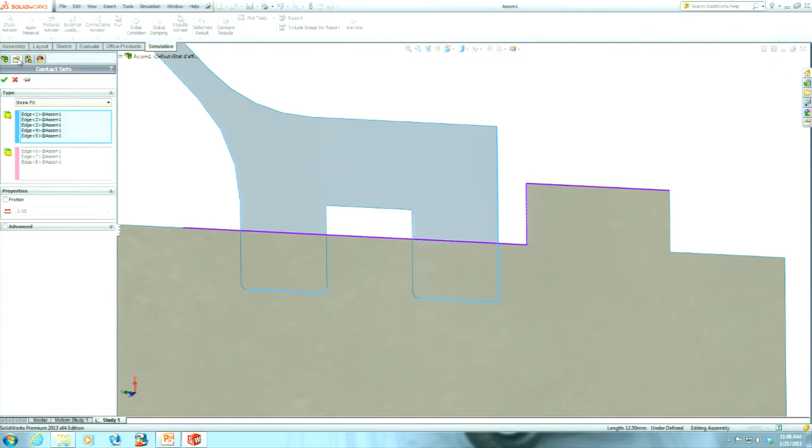Now I'm going to show you the stresses at time step 1, to show you that at time step 1 we got the initial interference resolved correctly and everything looks fine. And let's animate.

Move this a bit to the side. Cool. What's going to happen? Check this out. Bang, bang. How cool is that? Is that nice?

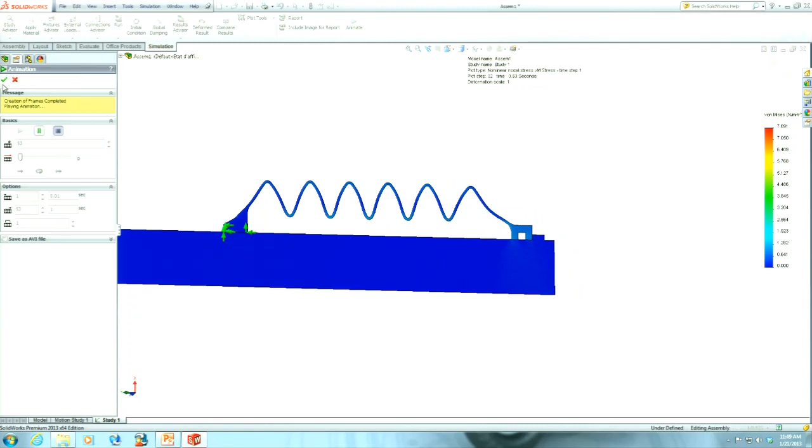Not only that, but you can also create it, of course, with the 3D view. Check this out. How nice that looks. Wouldn't that look good in a report? Yeah, I think so, right?

And of course, you can animate it. Now with 3D, it will take a little bit of time to animate all 53 steps, but the result is quite nice.

Couple of questions while it creates the animation? No? All right, we can just watch and... I have a question. Oh, you do have one?

Yes. How does the solver pick which bellows it collapses on? The question is how does the solver choose which bellows it will collapse on. And the answer is that it's basically random, just like it would be in reality. As soon as one starts to buckle, it reduces the stiffness locally, and it will buckle further until it reestablishes contact with the other bellows right next to it.

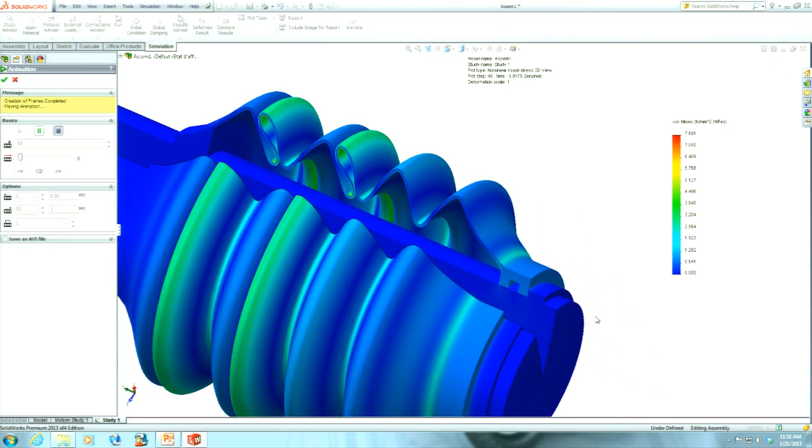How cool is that? I like this. I love this. And you'll have it, you can play with it too later on. Cool. All right.

So the nice resources that you can check out for all your information needs are listed there. You probably know that already, so I don't need to spend time on this.

I just want to take this opportunity, since we have about 5 minutes left, to have a little chat about the SolidWorks World Top 10 list. Who doesn't know what the Top 10 list is? The Top 10 list is a kind of global survey that we conduct to provide users with an easy way to tell us how you use the software and how we can improve it to meet your needs.

It's a global survey we conduct. First people give ideas, then there's a second step where people vote, and then it all gets ranked. The top 10 ideas are presented live on stage, I think on Wednesday morning, in front of 4,500 people cheering for the ideas they like. That is something.

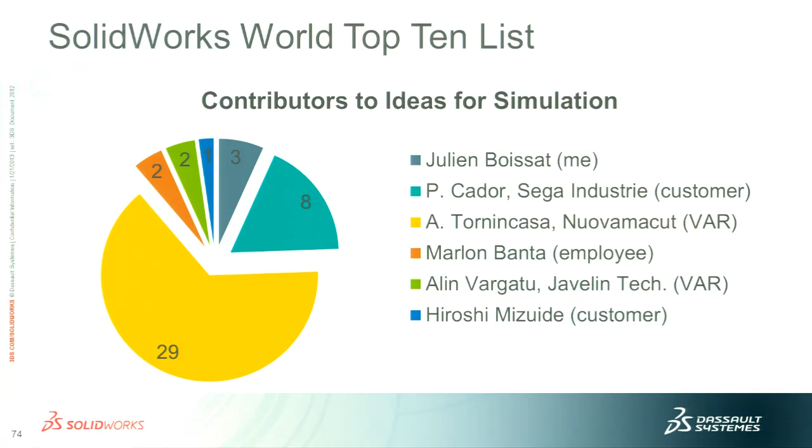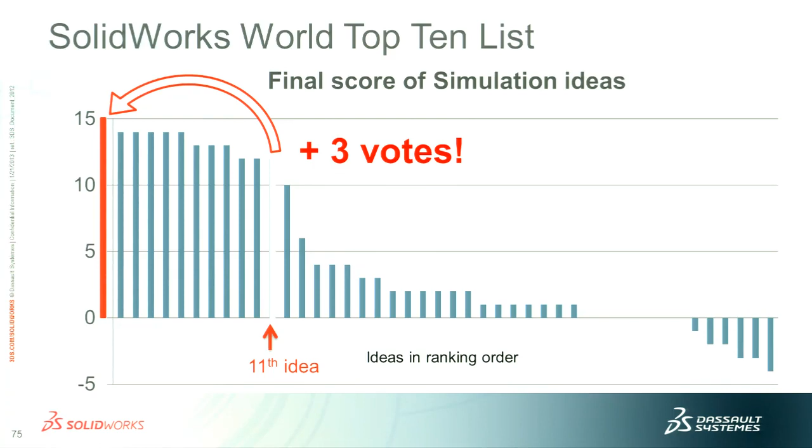You're putting it on us. I'm showing you the opportunities. Mark your calendars, is my suggestion.

This year, November 11th - you pay tribute to your veterans - and you search the SolidWorks forum for the SolidWorks World 2014 Top 10 List idea submission, and you submit ideas.

On December 9th - and I'm making up the exact dates, but it's going to be in the ballpark - this is early in the process. You have 1 month to submit ideas, and then 1 month to vote. This year we closed on January 4th.